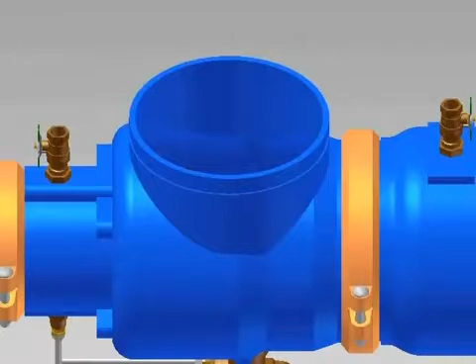Loosen and remove the 2 nuts and bolts on the groove coupling on the cover. Remove the coupling halves, gasket, and the cover. To remove the number 1 check valve, unscrew and remove the 4 nuts and washers around the outside of the check with an 11/16 socket. Slide the check assembly back off the studs in the body.

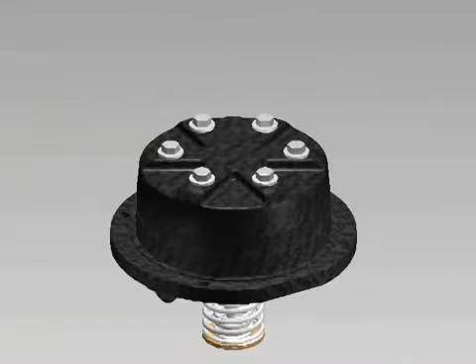Always service the checks one at a time to avoid mixing parts. Both checks can be repaired following the same procedure. You will want to remove the bolts from the seal retainer on the check, then remove the retainer. Remove the seal ring and inspect the face for cuts or embedded debris.

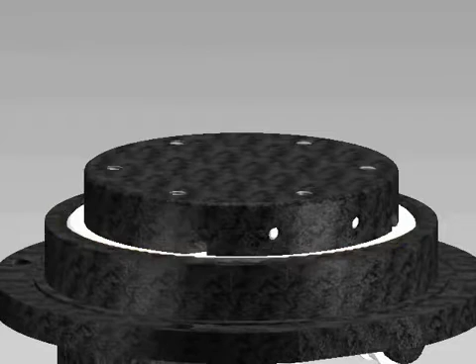For a temporary fix, you can flip the seal ring over to use the smooth side while waiting for new replacement parts. Inspect the sharp edge of the seat with your finger for any damage. Inspect O-ring in the groove on the seat for debris or damage. Replace any damaged parts. If you are installing a repair kit, replace the seal ring, seat O-ring, and bolt O-rings.

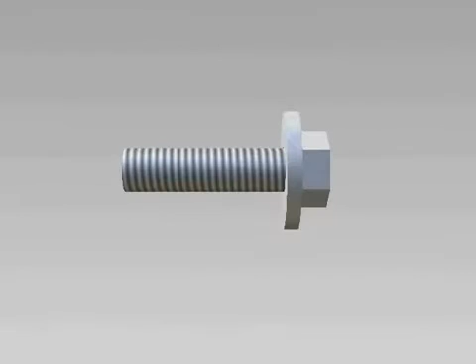Reassemble the check and tighten the retainer bolts evenly. Clean and inspect the O-ring sealing area in the body. Next, you will lubricate the seat O-ring.

To remove the number 2 check valve, unscrew and remove the 7 nuts and washers around the outside of the check with an 11/16 socket. Remove the stainless retaining ring from the studs. Slide the check assembly back off the studs in the body.

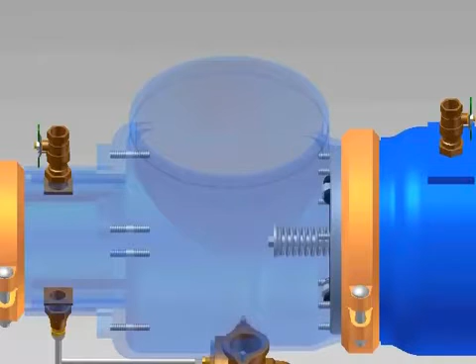After servicing the number 2 check, place it on the studs in the body. Slide the stainless steel retaining ring onto the studs. Place the 7 washers and nuts on the studs and tighten the nuts evenly.

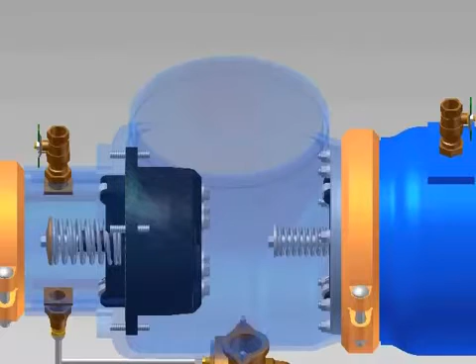When placing the check assemblies back onto the studs in the body, you want to make sure the O-ring stays in its groove. Place number 1 check assembly onto its studs in the body. Place the 4 washers and nuts on the studs and tighten the nuts evenly.

Place the groove coupling gasket over the valve opening. Lubricate the outside of the gasket. Replace cover and reassemble groove coupling. Make sure coupling is seated properly and the ends of the coupling halves touch. Close test cock.

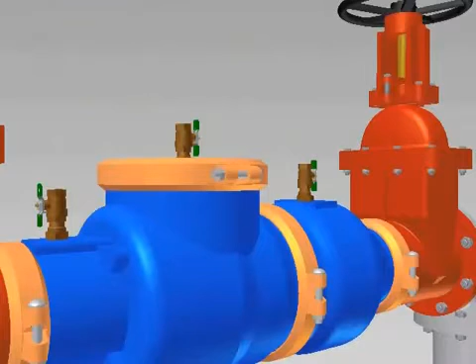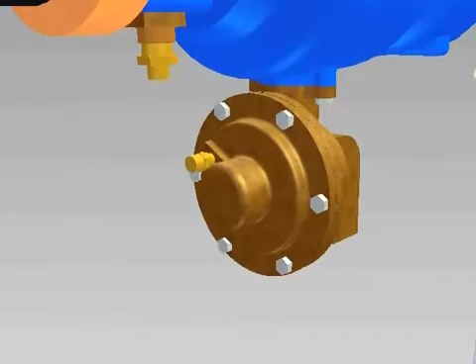Before servicing the relief valve, make sure to check the troubleshooting section of the instructions. The most common cause of discharge from the relief valve is debris in the number 1 check valve. Unscrew pressure sensing hose from relief valve cover fitting. Unscrew the bolts from the relief valve cover counterclockwise.

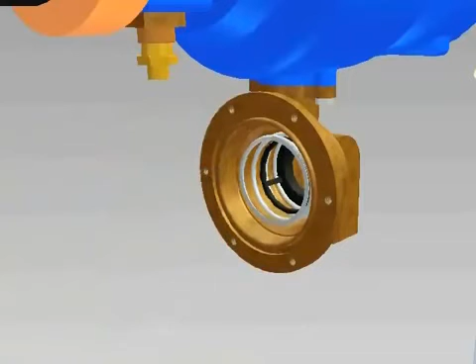The cover is spring-loaded, so leave 2 bolts opposite each other to remove last. Hold the cover tightly in place as you remove these last 2 bolts. Pull the cover straight away from the valve body. The relief valve cartridge will stay in the cover.

Remove the spring. Inspect the sharp edge of the seat with your finger for any damage. A damaged seat can be replaced if required by pulling the seat straight out of the body. Make sure to lubricate the O-ring before installing a new seat.

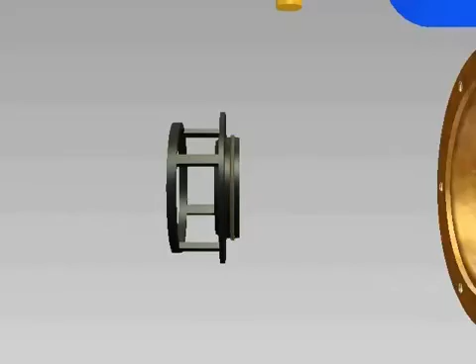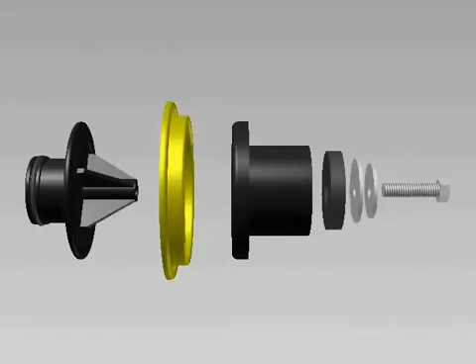Gently pull the cartridge from the relief valve cover. Inspect the seal ring for any cuts or embedded debris. You will want to disassemble the cartridge by unscrewing the seal ring retainer screw. Inspect the diaphragm closely for wear or holes. Inspect the O-ring on the upper plunger for any cuts or damage.

Clean the components and replace any damaged parts. Next, you will want to carefully reassemble the cartridge and tighten the seal ring retainer screw. Lubricate the O-ring on the upper plunger. Place the spring around the seat in the body. Insert cartridge assembly into the spring.

Place the cover onto cartridge assembly and push the cover towards the body. Make sure the cartridge centers into the seat guide ring and the bead of the diaphragm fits into the groove in the relief valve body. Align hose fitting on cover to the left of top center.

Thread 2 screws into opposite holes by hand while holding the cover in place. Thread the remaining cover screws into place and tighten all screws evenly. Thread hose onto fitting in relief valve cover and tighten with wrench.

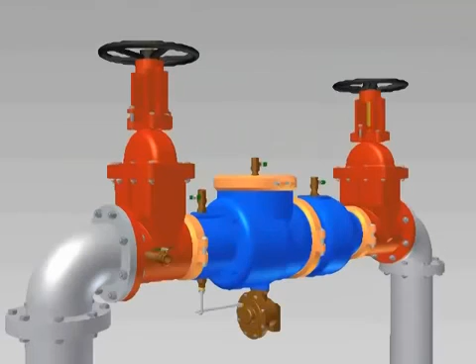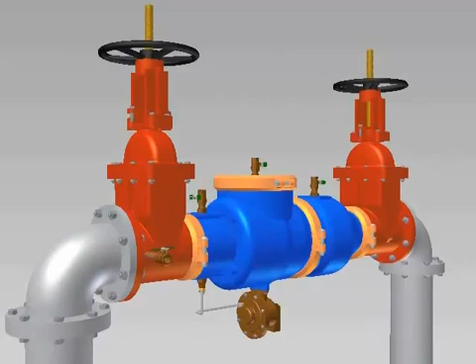Open your inlet valve slowly to pressurize the assembly. Inspect for any leaks. Open and then close test cocks to bleed air from the assembly. Open your outlet valve a small amount and wait for system to pressurize. Fully open the outlet valve once the system is pressurized. The valve should be tested by trained personnel to confirm that it is working properly.